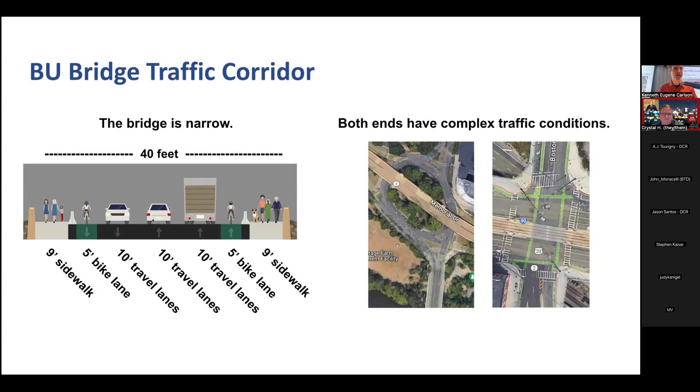A lot of moving parts: pedestrians, cyclists, cars, and turning cars. Peter will go into detail on that. And then the corridor itself - the corridor is not just the bridge, it's the rotary, it's the Comm Ave intersection.

On the bridge itself, 40,000 cars a day, 2,000 bikes a day, and thousands of pedestrians. Two MBTA bus routes crawl through the corridor, plus several shuttle bus routes. Many more people traverse the travel corridors parallel to the bridge, including the Paul Dudley White bike-ped path. Many people cut across that mouth of the bridge, and it's very dicey for anybody walking or running, with all the cars on Comm Ave.

The root of the difficulty of this bridge and corridor is that it's multi-jurisdictional, as Senator Brownsberger was saying. DCR owns Memorial Drive, the river paths, and the rotary. MassDOT owns the bridge and Comm Ave intersection. The City of Boston operates the traffic signals right here. The MBTA operates the bus service over the bridge.

We have Becca Wolfson here from the MBTA. City of Cambridge owns the streets approaching the bridge - are the people from Transportation Cambridge here? Yep, there we go, hello guys, good to see you. And the Town of Brookline owns the street to the south - anybody from Brookline? Oh hey Amy, how you doing, good to see you.

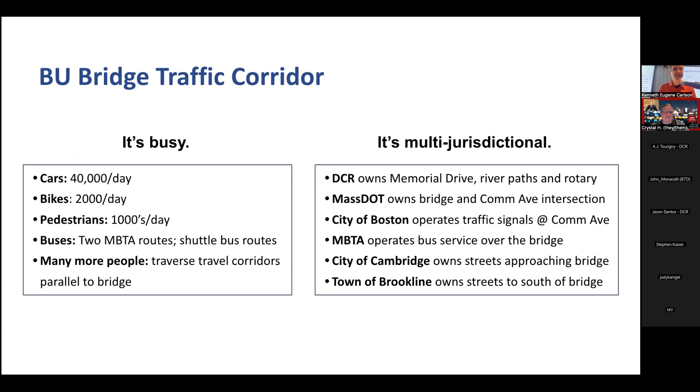So obviously it's multi-jurisdictional, which makes getting things done on such a corridor difficult. So what we did was bring together this alliance - we pulled together this impressive group of advocates who were undaunted by the multi-jurisdictionality of the corridor. The goal was to identify traffic safety improvements with a primary focus on vulnerable road users.

But we gave ourselves these constraints: the bridge is not going to get any bigger, so we proposed no change to the number of travel lanes. We didn't want to make traffic worse for local residents in Cambridgeport, but we wanted to maintain, if not improve, vehicle throughput. People in Cambridgeport are already suffering enough, so we focused on quick-build, low-cost improvements to improve safety.

We spent our first year working with these constraints, developing and honing recommendations, which Peter will walk us through. Then we spent this past year socializing these improvements, gaining feedback, and pushing for implementation. We shared these recommendations with DCR, MassDOT, BTD, MBTA, Cambridge, Brookline, BU, and a host of other advocacy organizations and neighborhood associations. We circulated a petition last year and got 850 signatures to date.

We haven't done anything further with that petition - I'm sure we'd have thousands more if we kept pushing it. We held our first public meeting on the BU campus last year, and now we're meeting with you all this evening. I want to point out that we've worked very closely with DCR, who have been really amazing in terms of their receptivity to what we've been proposing. We've had a number of meetings with them - in fact, Peter and I were just meeting with DCR last Tuesday.

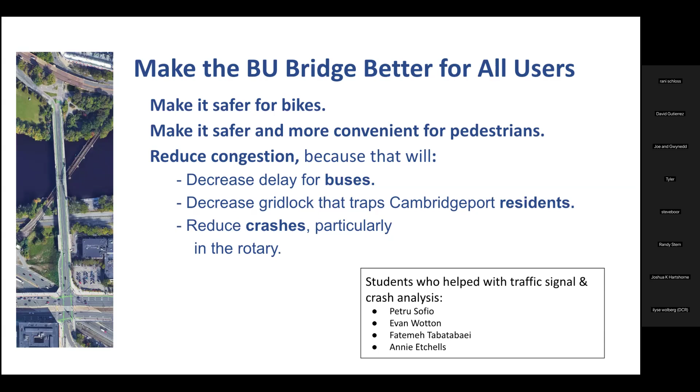And we want to also reduce crashes. For bike safety, as I've said, there isn't a protected bike lane, but it's easy to focus on what's on the bridge. When you get off the bridge, we have these conflicts with right-turning cars.

You can see over here when pedestrians are crossing Comm Ave, at the same time cars from Comm Ave are turning right. Sometimes 300 an hour are turning right, trying to get through.

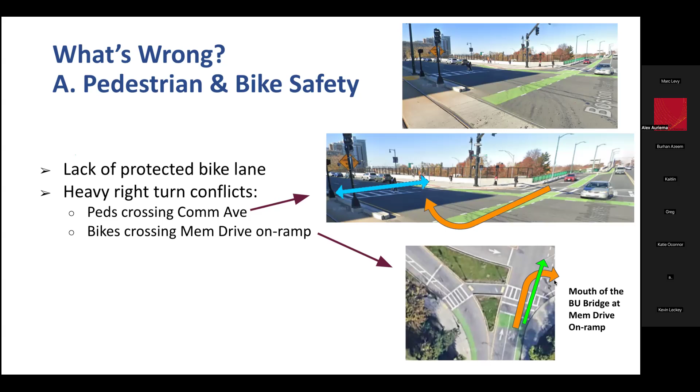And then on the other side of the bridge, when bikes are trying to get through, leaving the bridge going into Cambridge, cars are turning right at the same time, 496 an hour. It's amazing.

And then the massive congestion makes things slow, as I've mentioned, and there are a lot of crashes and injuries. The last time we studied this, we looked at this 5-year period, and there were 87 crashes, including 15 bike and 2 pedestrian crashes. The largest number were in the rotary, 55 in the rotary.

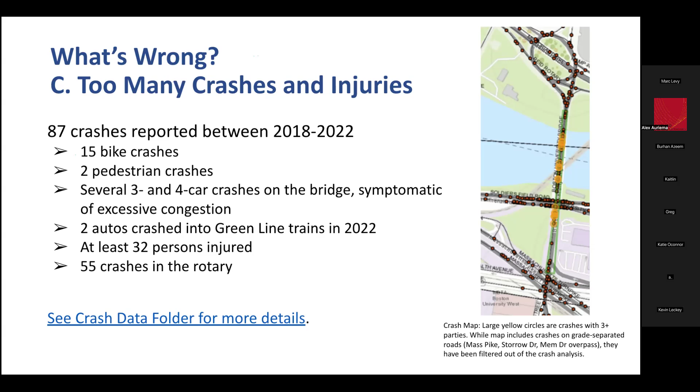So our proposal is kind of comprehensive. We want to fix things everywhere for everybody. For bike safety, it includes protected bike lanes, signal separation, a wider path along Mem Drive, and safety improvements to the rotary. For pedestrian safety and service, the signal separation I've talked about, some crossings across Comm Ave, and synchronized ped crossings at Mem Drive.

If you see those red asterisks there, we've gone through a few iterations. Our first iteration, we wanted to make things better for pedestrians by making things a little bit better. We had a plan to make things a little bit better. Then Boston looked at our ideas and said, well, we have an idea, we can make things a lot better. And when we saw that, we said, totally, yes, you got a great idea. So our concept has changed to go along with that, and relieving congestion.

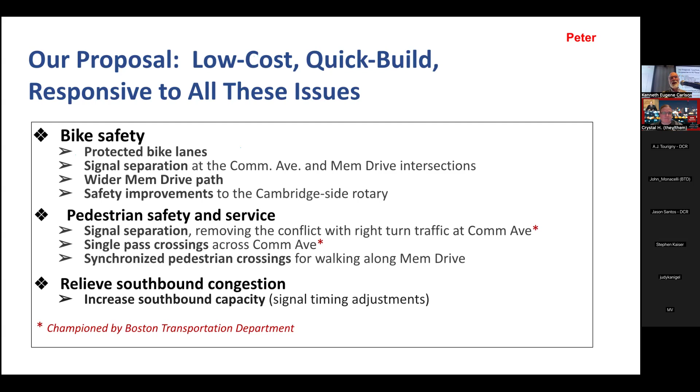So to make it safer for bikes, everybody knows the current situation: there are no protected bike lanes. What we've learned is you can turn a bike lane, if it's not next to a parking lane, you can just put a little barrier there. Even flex posts work because they make bicyclists really feel this is a place cars stay out of. We already have it on the Museum of Science Bridge, which MassDOT owns.

People say, oh, the bike lanes on the BU Bridge are so narrow, it wouldn't fit there. Well, thank you to our friends in Brookline. They did an experiment, they put flex posts like this on Harvard Street in Coolidge Corner, which is even narrower than the BU Bridge bike lane. When you ride your bike through there, yeah, you get the feeling this is kind of narrow, but you just ride through and you don't have cars double parked there. You really are separate from cars.

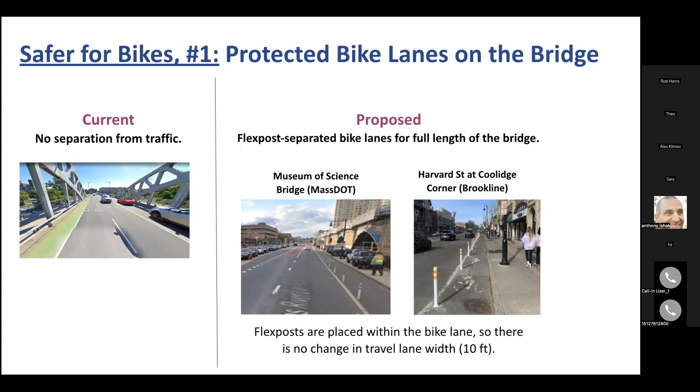So when we asked our friends at MassDOT, is this something you would consider doing? You've done it on one bridge, is this something you'd consider doing on the BU Bridge? They said, yeah, sure. Oh, okay. All right, number 2.

Now, a little more thorny is getting that signal separation when you're leaving the bridge. I described to you the situation on the Cambridge side where the problem is that cars have 2 lanes, and from the rightmost car lane, some cars are going through, but some are going right. So what we propose is to change it so that only 1 lane is for through-going cars and 1 lane is for right-turning cars.

That way, the right-turning cars get their time in the cycle with a green right arrow, while bikes and pedestrians have a stop signal. Then the right turns' phase is over, and pedestrians and bikes get their turn, free from traffic. You might think there won't be enough capacity for cars because of the right turns, but remember, when you're turning right, you really can't go through pedestrians and bicyclists anyway. It turns out there's plenty of capacity, since more cars go straight through than turn right, and the light will just be green longer for through traffic than for right turns.

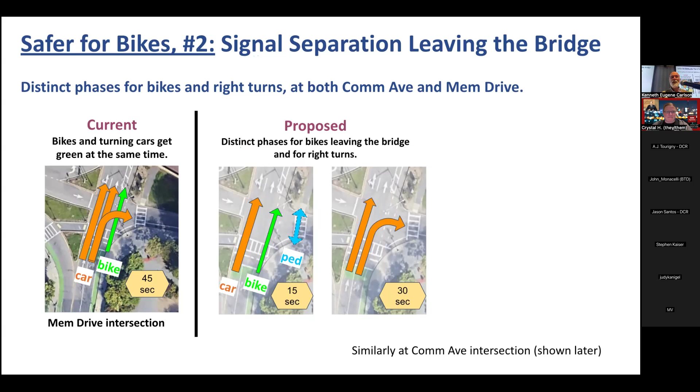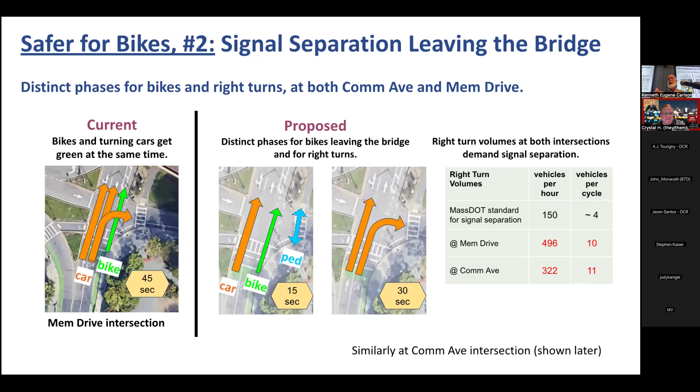The last time the BU Bridge got major improvements, around 2012, some of you were involved. They made huge improvements for pedestrians walking along Comm Ave, and really nice improvements for bike lanes along Comm Ave, protecting bikes from right turns. But it was too big a problem to deal with the other direction at that time. Now we're getting to the other direction, and it's way beyond standards, so we're going to deal with it.

A third way to make it safer for bikes: when you cross the BU Bridge and head up the ramp toward the BU Boathouse, MIT, and Kendall Square, there's a narrow sidewalk. Bicyclists often have to go in the street because there's no room on the sidewalk. It's a question of giving cars the space they need and nothing more — cars need space for one lane, they don't need anything more. So this whole area that cars don't need should just be turned into sidewalk.

I'm happy to say that right now, our friends at DCR have their shovels in the ground — they started that a couple weeks ago. And likewise, on the Memorial Drive path, the Paul Dudley White path upriver from the bridge, that's going to be made really nice and wide.

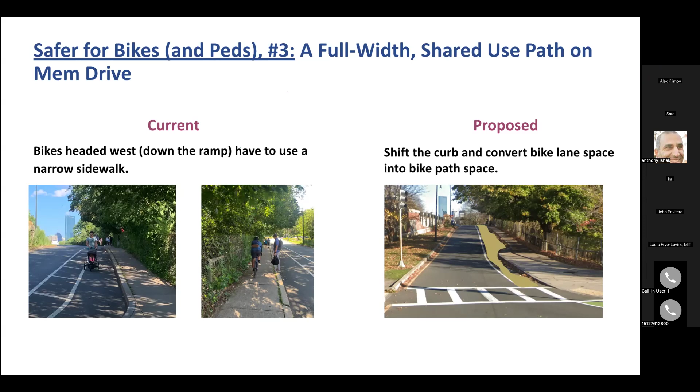The last thing for safer bikes: we need some more fixes in the rotary. When you come down the ramp from Memorial Drive, there had been a yield sign. Yield signs are for freeways — you're coming down to a city street, and at city streets what do you have? Stop signs. On top of that, there's this big bridge pier — you can see the big brick pier — so car drivers can't see who's coming. You don't want to combine that with a yield sign; you need to stop so you can look and see.

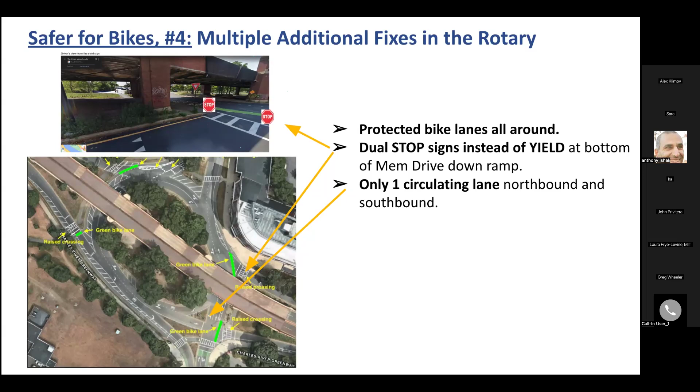Our friends at the DCR said, yeah, no problem, you're right — stop signs, bingo. Here we go, and several other changes. We'll be hearing from DCR later. Some things they're able to do now; the rest we're working with them toward implementing next year.

Then when we get to the Comm Ave intersection, we're going to have signal separation. The way it is right now, if you're walking across this crosswalk, there are hundreds of cars an hour turning at the same time, and you're competing with them. So how are we going to change it? We'll have a short phase just for right turns.

Right now there's one through lane and the next lane is also for through traffic. That's going to change — there will be two lanes turning right. First we have a short turn phase to clear out whatever cars are there. Then we have a nice long phase where through cars, bikes, and pedestrians can go, but right turns are stopped. When pedestrians have cleared, anybody turning right just moves over and stacks up in these lanes. We've got room to store them, and then out they go — we get good capacity.

So here's the best way to get to it. Okay, here it is. Okay, so watch this.

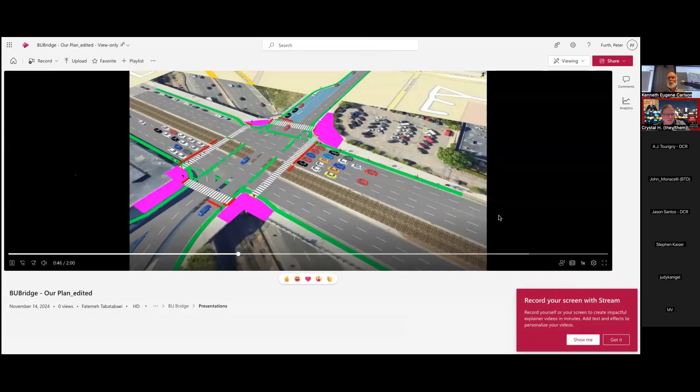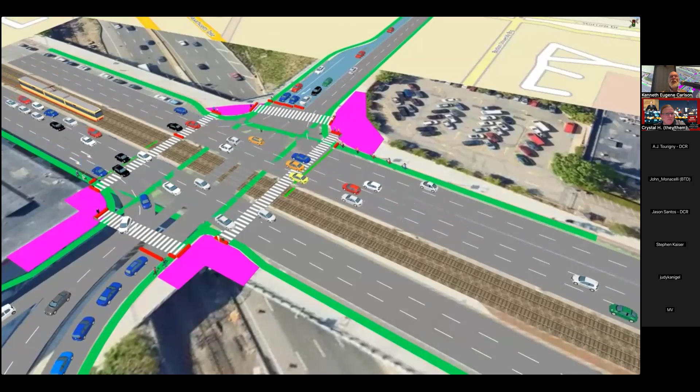All right, the road with the blue surface, that's the BU Bridge. Now watch the traffic on the BU Bridge. As the light is red, cars stack up. On the side, you'll see some pedestrians coming over and waiting in these places, and you'll see how they get through with a single pass.

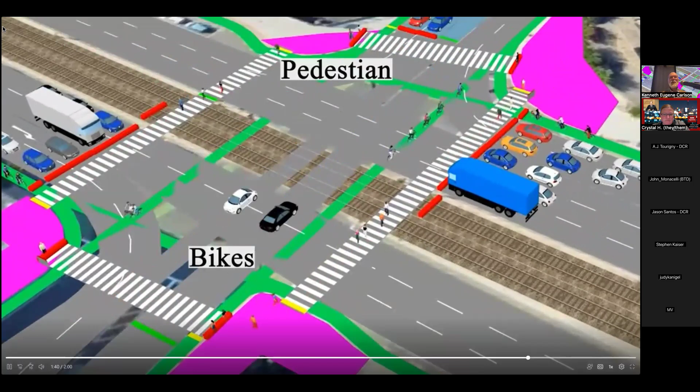Now the light is green. These pedestrians start walking, and at the same time we're clearing out the right turn here, but that ends quickly. The pedestrians who are walking pause for a second or two, then finish their walk. Then pedestrians go in the other direction. The bikes are going, and all this time the right turns are being held. Once the pedestrian phase is over, the second right turn phase goes, and with that combined operation we get about 20% more cars through than are getting through now. So we get better pedestrian safety, bike safety, and some congestion relief at the same time. It's a great win-win.

How do I get back to the— here we are, okay, all right. I get nervous about the power on the computer, because when that goes we are in trouble. I don't know if we're going to reach. Yeah, it's a tripping hazard now, sir. Let's just make sure we actually have some power coming through. We do. Wonderful. So be careful, you've got your border right here, buddy.

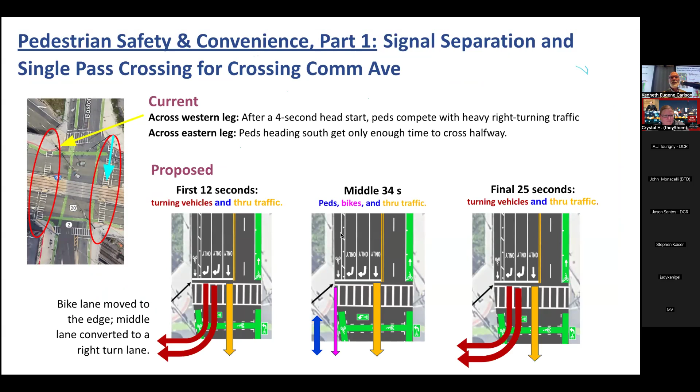I don't know if you mentioned the pocket bike lane being out. Yeah, you're right, I didn't mention that. So here at the BU Bridge, instead of a pocket bike lane, which is what we have now, where you're riding a bike between two lanes of traffic, the bike lane will be all the way on the side, on the edge, with the flex post separating you all the way to the intersection.

On the Cambridge side of the bridge, one issue is that there are two pedestrian crossings, but they're not coordinated. So you cross, get to the middle, and have to wait there until your walk signal comes up for the other half. What we're proposing is to coordinate them both, put them on the same cycle, so pedestrians walking in this direction start walking, and when they get to the second crossing it's still on that flashing don't walk, so they can finish their walk. Pedestrians in the other direction likewise start here and finish there.

I call this the trapezoid method of coordination, because you see the pedestrian phase on one side is not the same length as the other. That's because cars need more time over here, and they need less time over here. So you just shift the green time from one side to the other and get more efficient as well.

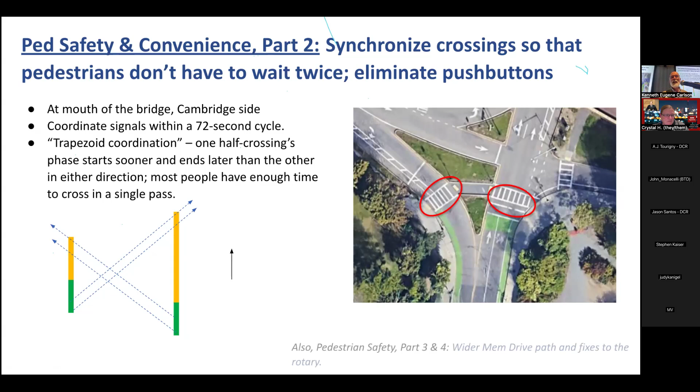Here's a video of how traffic—it'll start with how traffic is now.

All right, here's how it can be and will be.

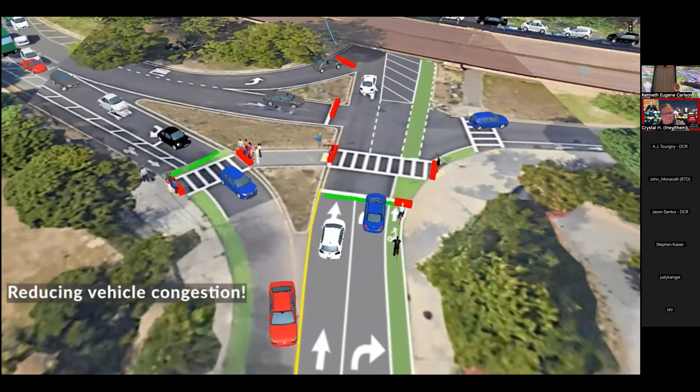And we've asked the DCR to mount speakers and play this music. Yeah.

Well, you know, what you put in the simulation is what you get out.

The creator of this is here, so I want to honor him by letting it play to the end.

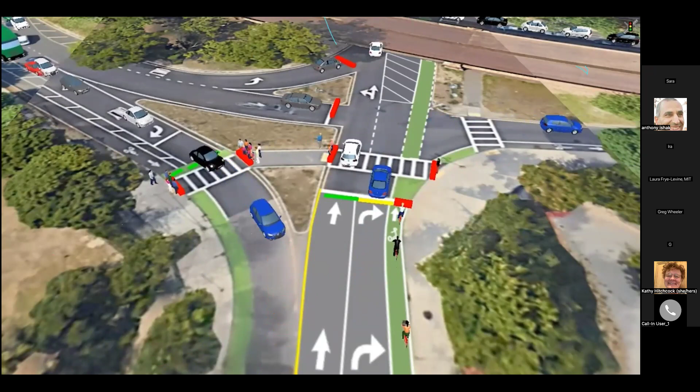All right, you want to give Evan a hand—the first one was by an investment banker. And the first video was made by a student who's here, Fatemeh, so thank her. Okay, wait, here we go, okay.

As far as reducing congestion, one big puzzle, if you're a traffic engineering person like me who loves puzzles, is what is the real bottleneck on the BU Bridge? Is it the intersection on the Boston side here, not releasing enough people, like the green isn't long enough? Or is it that crosswalk on the Cambridge side that stops traffic so nobody can get onto the bridge? It turns out they are both bottlenecks.

So to reduce the congestion, we're working on both. On the Comm Ave side, I've shown you how with two right turn lanes and a smarter way of operating the signal, we can get a 20% increase in capacity. On the Cambridge side, by coordinating the signals, the cycle will be longer. A lot of times you'd say, oh, but that's not good for pedestrians, a longer cycle—yeah, but it's a longer coordinated cycle. So you have to wait a little longer for the first crossing, but you won't have to wait at all for the second crossing.

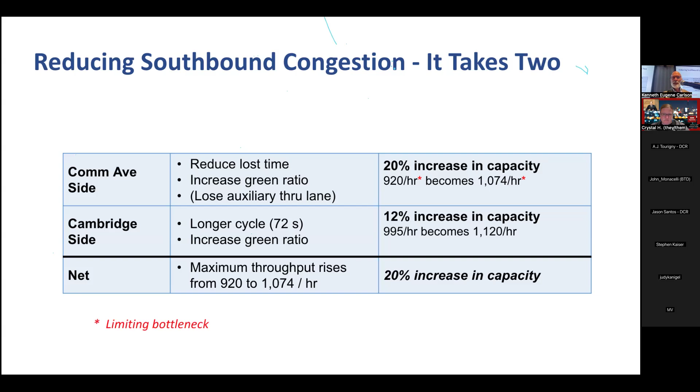Then I'll give you an overall picture of the timeline for the improvement.

First is widening the Charles River paths at the Rotary, and the DCR owns that, and they are doing that right now. The next, when you get up going around to get to the boathouse where John Corkin was killed, there we saw there's a vulnerability that cars coming over the overpass have to turn, and if they're not paying attention, they're just going to mount right up on the sidewalk.

So we've talked about adding a crash barrier there, and that still has to be permitted, but we hope that'll happen soon. Then the next set, they're colored together because they have to be done at the same time, doing the other fixes in the Rotary.

And the other changes of the Cambridge side intersection, including putting up some new signal equipment, a mast arm—that's a mast with an arm, traffic engineering word, and then the lights hang down from it. So that's going to take some time, but hopefully that will be done next year.

And then the new changes in signals, that could only be done at the same time that you change the striping to say one lane for through traffic, one lane for right turning traffic, and working with MassDOT to make that happen. Then here on the Boston side, we need to have the lights retimed, a few new signals put up, some new bike signals.

And that has to be done simultaneously with restriping.

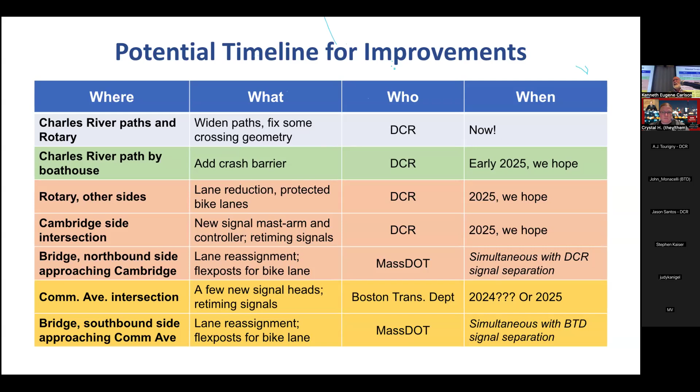That change and the Commonwealth Ave signal changes could happen this fall if they can get to it before it gets too cold. Once it's too cold, you can't lay down striping, and then we have to wait till spring. So it's just a very optimistic timeline ahead of us. So, hoorah.

Only Peter Furth can make civil engineering fun.

Okay, so now we're going to hear some stakeholder perspectives before we get to our colleagues from DCR and BTD.

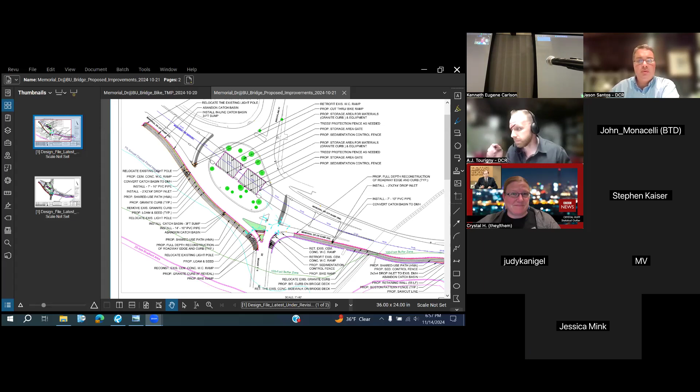Bear with me, here we go. So this is the construction plan for the short-term improvements on the BU Rotary side of the BU Bridge.

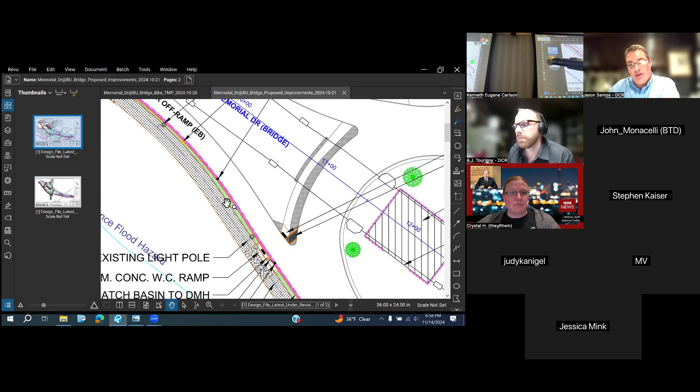The improvements started at the Magazine Beach entrance, here's the outdoor gym area to Magazine Beach. If you look closely, the gray line represents the old curb line, the purple is the new. We essentially took the sidewalk from a 5 to 6 foot wide sidewalk and made it a 14-foot wide shared use path.

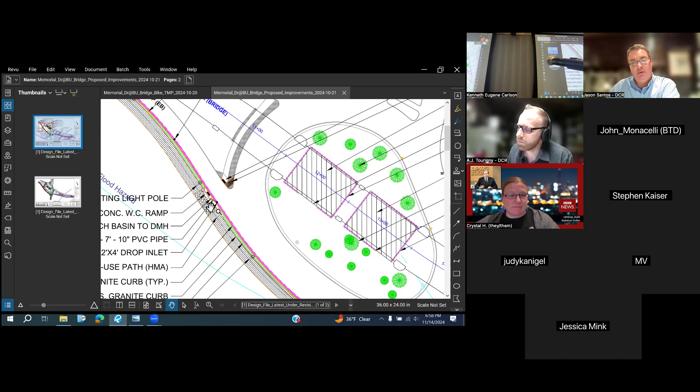We widened the wheelchair ramp connecting to the Rotary, added bike ramps, and widened the sidewalk under the Reid overpass, making that a shared use path as well. We had to do some catch basin relocations to push that curb line out. The widening continues up towards the BU Bridge, with another catch basin relocation and a light pole relocation.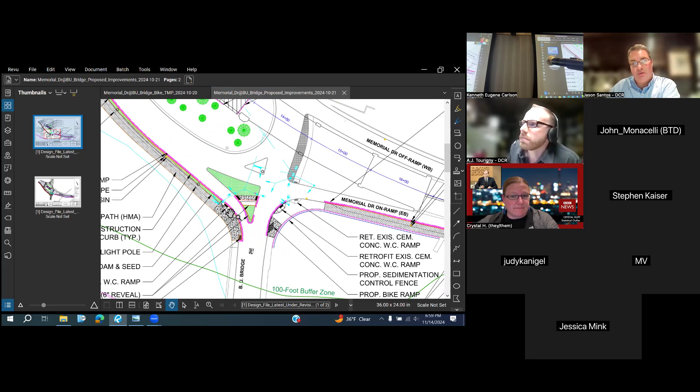So again, 14 feet continues all the way up to the BU Bridge. We widened the wheelchair ramp near the intersection that Peter was showing you earlier, and we added a ramp for bikes only, so as you're coming up around you have the ability to drop down onto the BU Bridge surface and continue up and over the bridge.

I'm going to jump over to a couple of progress photos. This was about a little over a week ago, in that area widening the sidewalk. We're paving the entire 14-foot wide width. This is the opposite view, turning 90 degrees towards the Reed overpass.

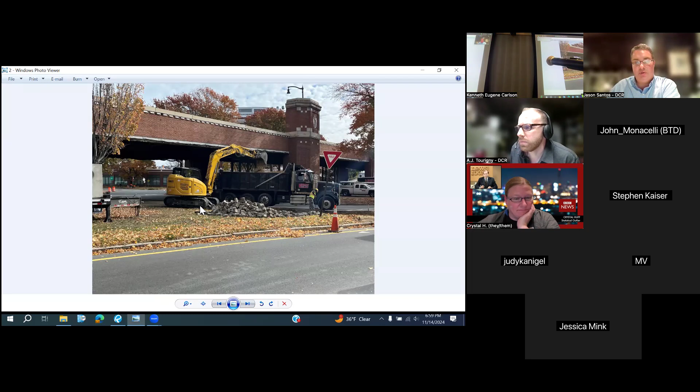We are demoing the sidewalk under the Reed overpass and repaving that entire area. And this is up near where I was just showing you, near the intersection of the BU Bridge, paving all of these new wheelchair ramps much wider and in concrete.

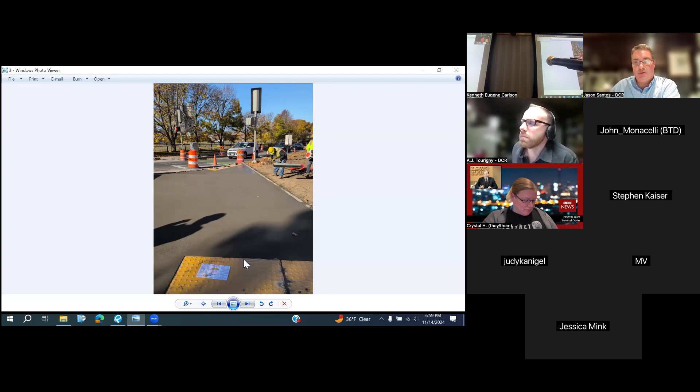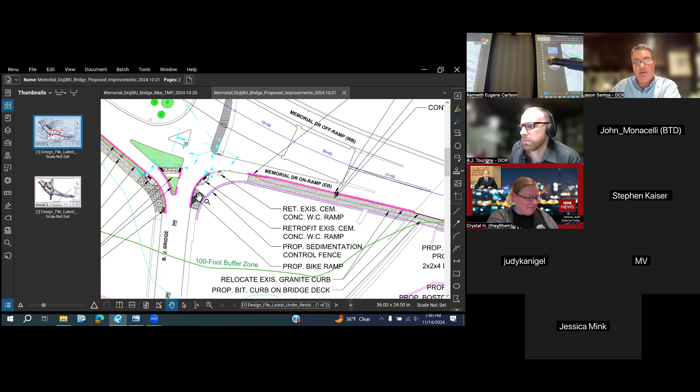Jumping back over to the rendering, we widened this crossing through the island to accommodate both peds and bikes. We widened the wheelchair ramp. On the east side, we created a bike-only off-ramp so that anybody coming up over the BU Bridge has a way on their bike to exit and get up onto the newly formed shared use path.

Similar to this side, we had to move a couple of catch basins out. This side is about 13 feet wide. We had some constraints with MBTA buses making that turn, so we maxed that out at 13 feet.

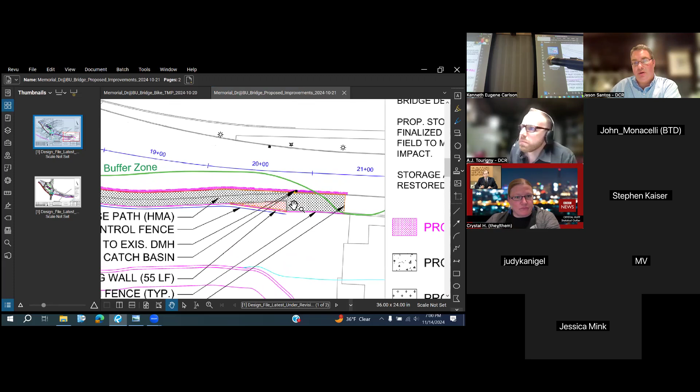That widening continues all the way up to the BU boathouse. This red triangle here used to be a jog in the sidewalk, created by a retaining wall. We've removed that retaining wall and created a nice taper going from 13 feet to approximately 15 feet in front of the BU boathouse. Again, another catch basin removal.

And I'm going to show you just a few photos of that side. Just bear with me.

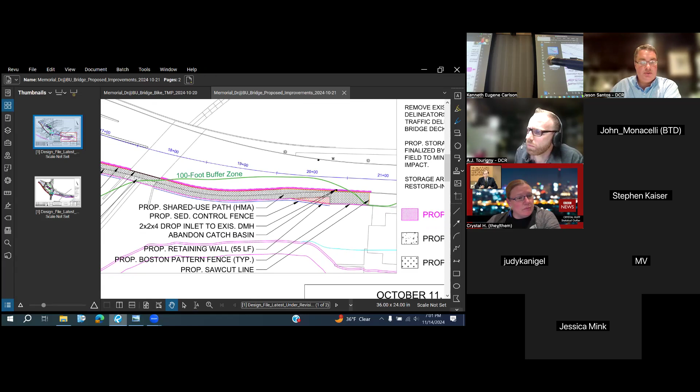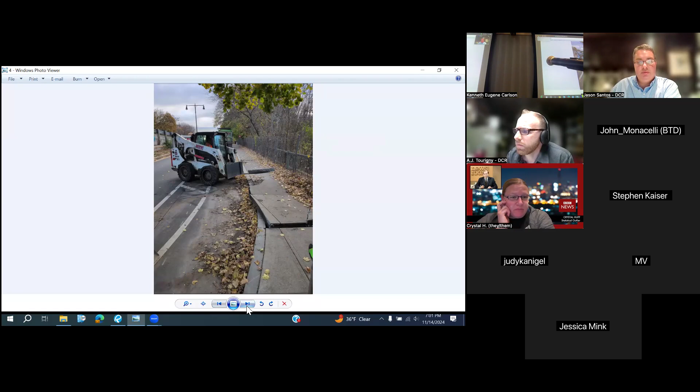This was just this week and last week - we were demolishing the sidewalk going up the eastbound on-ramp, heading up to the BU boathouse. This is a view from up near the BU boathouse looking down. The detour is in place and that piece of equipment is working its way up.

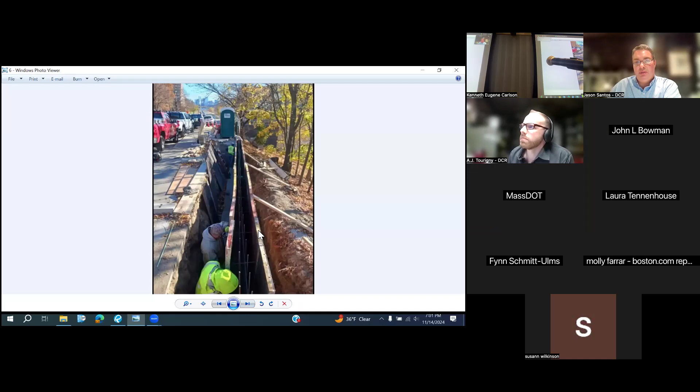And this is rebuilding that retaining wall and creating that triangle shape. This will eventually be filled in all with sidewalk to make a nice wide taper. And that's about it.

Jason, there's a room full of smiling people who appreciate all those things that you're doing.

Oh, can we hold the questions till the end, and we'll come back. But anything else, Jason and AJ, from your side? I think that covers it, Ken. I appreciate it. Yeah, that covers it, Ken. Thank you very much, and thanks to you and Peter for all your help. Thank you. Okay, great. Well, I think we're going to go then to John Monacelli. After John, then we'll get to hopefully a robust Q&A period. So, John?

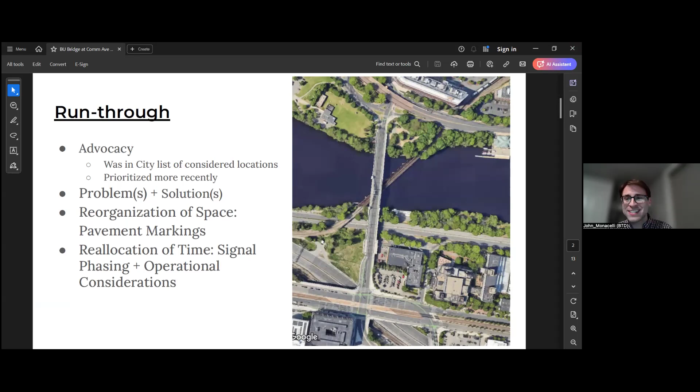So focusing on this southbound approach on the bridge, technically, as the professor said, this is on terra firma. So essentially the top of that photo until where you see the bridge joint rejoin to the intersection, that is technically DCR land. So Jason's been very kind to allow us to present a variety of things over to him and his agency for consideration. And again, all of you folks have been working on your side to convince him and others that we can do this.

So right now, the biggest problem listed is the southbound right turns. So folks coming down the bridge, going from that one lane, kind of on a downhill slightly, crossing over the bike lane, and then going into that rightmost turn lane. And then while that's active, making that turn over those pedestrians who are in the crosswalk.

Right now, as folks have said, these are the volumes roughly for the peaks that we use in the models. As you can see, they're well in excess of our guidelines currently for permissive vehicle-to-pedestrian conflicts.

So that's one piece. And then, as I mentioned, this crossover point on the bridge, and then an overwhelming concern or kind of like a need to look at how long cyclists are allowed or provided time to get fully through the intersection, right? We know that there's a range of speed cyclists can take, but most of them are lower than the 32-mile-an-hour average of the driver. So really taking a quick look at those to see how we can lift those clearances for all-red times or different intervals to keep people safer before cars start moving in the opposite direction.

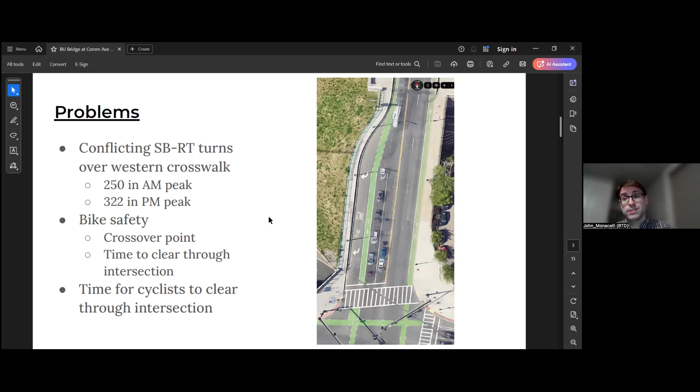Quick, so those same problems on the left, no photo, sorry about the text. But these are our kind of considerations quickly for what we're doing.

That conflict with the right turns, we're going to take the bike lane and shift it over, or we're asking DCR very nicely to take the bike lane and shift it over to the curb. And then we're going to kind of reorient how many lanes we have, and we're going to phase separate, is the technical term. So we'll just be running folks who are making the right turn, and everyone who's kind of going up and down north-south will have, they'll all get their separate turns. We won't have them interact at the same time. So that solves that problem.

As I mentioned, bike safety and that crossover point, moving it against the curb removes that interaction coming off of the bridge. Again, when folks are kind of coming down the crest, not a great time to be maneuvering downhill with the interaction. And then that last part, super easy.

We're just going to recalculate those equations for the red times to make sure that someone going 12 or even 10 miles an hour, perhaps, can make it all the way through that intersection before something else starts to move and to stress out that user.

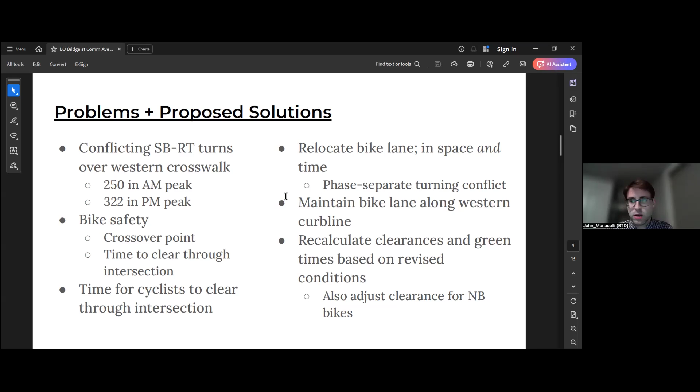So just a couple quality things to add here on top of the safety pieces. It's a reorganization of space, as Ken and some others have stated and reiterated. We don't have any more space coming in the short term, so we have to use the 62 or so feet that we're given.

This is not a reallocation of the space, unfortunately. Right now, what we're just trying to put down is the structure of reorganizing. So this is no secret now, the big reveal has been spoiled. This is the comparative current on the left and the proposed, straight from the plans, clipped so savagely.

Sorry about that. As you see, keeping cyclists in mind, we're going to make a nice thicker line along the bike lane. Typically we use a thicker line like that on bus lanes or highway elements to really focus attention, but I wanted this thicker line here so that it lasts longer. It's just a feature of being on the road, the thermoplastic wears away, so the bigger the line is, the longer it'll last.

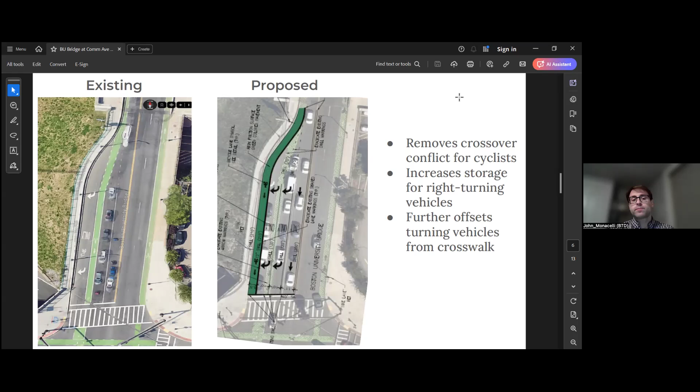And then go to this guy here, reallocation of time. As I said, we're aiming for the phase separation. We did consider a couple different alternatives just to try to see, to kick the tires and see if there was anything holistically that we needed to change at the intersection, or that we were able to change.

So we tried some things. We tried a single right turn lane and tried to see how we can make that work. But as others and the professor have laid out, there's a real concern for exceeding that storage. That new pocket is only so long, it's not granted to us the entire span of the bridge.

But ultimately, what we ended up landing on was a tenuous balance for the time being to do two right turn lanes and then a single through lane.

And again, that was run through a little bit earlier, but I just wanted to emphasize, when we ran through the traffic model, which is definitely not as cool as the one the professor had with his grad students, but when we ran the one that's inherent to the traffic-aware software there, SimTraffic, it does allow us to see some variability in the platooning of people coming over the bridge in kind of spurts and fits.

And what we're able to see is that for the most part, unless there is that Red Sox game, we're really only predicting that people are going to be stored on that bridge. Long-winded way of saying, we are not expecting that queue to go all the way back to the rotary right now. So as we continue moving forward, we're going to keep moving time around at the intersection to keep that as minimal as possible. But right now, we're not even predicting some really bad situations, so we're really optimistic about this.

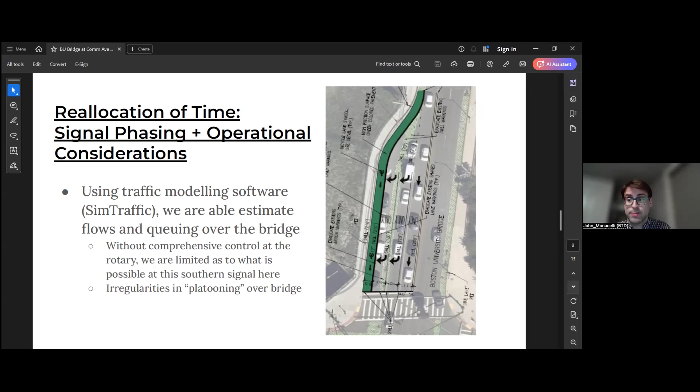Because when people can predict what's going to happen - more on grid streets to think about - but when people can predict what's going to happen, their aggression or their anxiety goes down enormously. So we're going to try and produce some of that predictability.

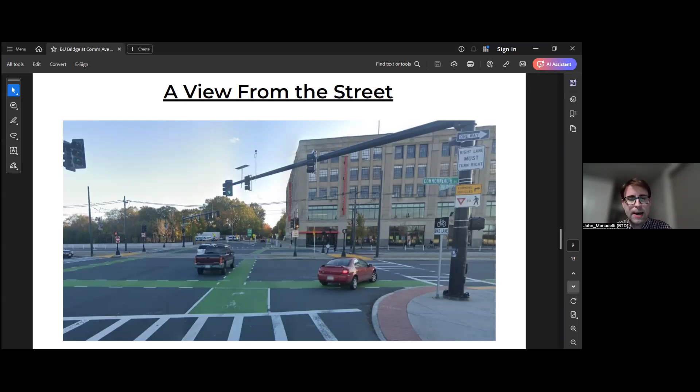We'll be swapping out some of those. We'll be giving cyclists some new indications to better clarify, to show them very clearly, now is the time not to be going, please. Now is the time for those right turners to be turning across, and vice versa for those drivers.

And again, we'll be watching this on several of the cameras that we have. If we're able to implement this fall or this winter, we'll be taking a look, keeping an eye on it. If there's any tweaks or any type of adjustments that we need to make, we'll be doing so.

Again, implementation - we've been sharing things back and forth with DCR. As the City of Boston, we're going to be doing the changes to the infrastructure on the signals, the wiring, the timing, and the controller updates. DCR would oversee the work directly on their right of way on the bridge landing for the minor resurfacing and pavement marking restoration.

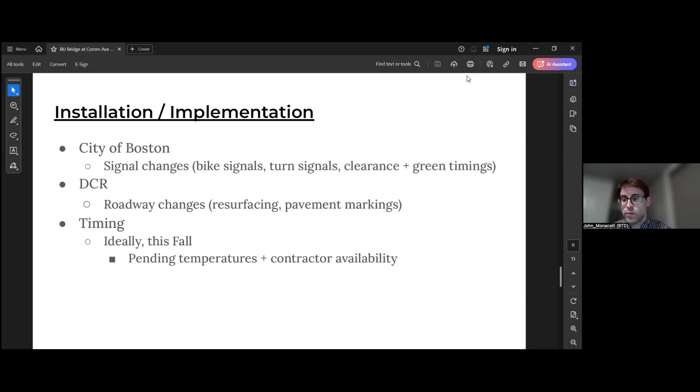Ideally this fall. So we're just kind of having everything packaged up and sitting waiting so that we can be ready to move when possible.

I mentioned post-implementation again. If we are able to install this winter, we will be keeping an eye on everything. I believe we also have a camera on the Cambridge, the Mem Drive side, so we can pull those both up, keep them side by side on a separate screen, and keep an eye on those in our traffic management center. It also allows us to do a bit of an adjustment period to see what is really sticking and what is actually impactful to the benefit of our plan.

Otherwise, in the spring we can continue talking over the winter about any additional adjustments or other changes to phasing and things like that. So this is not done, but we do want to get something on the ground as soon as possible.

And I know that we said questions later, but everyone needs a happy dog with a tie. So thank you guys so much.

Okay, so we are going to hear briefly from our colleagues at MassDOT, and then we'll open up to Q&A.

We've got Steve Miller pining very nicely about the fact, John, that you are willing to make changes continuously after implementation of what you guys will be doing. So I will turn it over to our friendly colleagues from MassDOT.

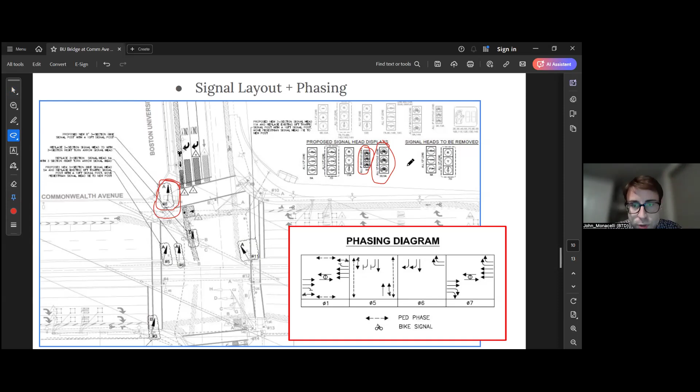Okay, so whether or not you can see my cursor, but this guy here - we see it, yep, there we go - that will be the smaller one here. It's just what fits, what wires in. So you'll be able to see that light as you come down the bike lane, down the bridge. And then these other two will be a lot bigger. They'll be the standard size of traffic signals for cars, but they'll have the lenses for the bike symbols. So those will be on 5A, that'll be down here on the transit way. And then with 3B, where are we?

Oh, I believe that's the one for eastbound, or westbound cyclists, sorry. So it'll be these two on the right-hand side. We will continue to see where we can move things around. Moving signals on top of mast arms is really difficult because of moment analysis. We have to be careful where we put certain things, and there are guidelines for the number of indications required per movement of vehicles, so we have to work backwards on that, unfortunately. But we're going to keep looking to see if there's better placements for those bike signals.

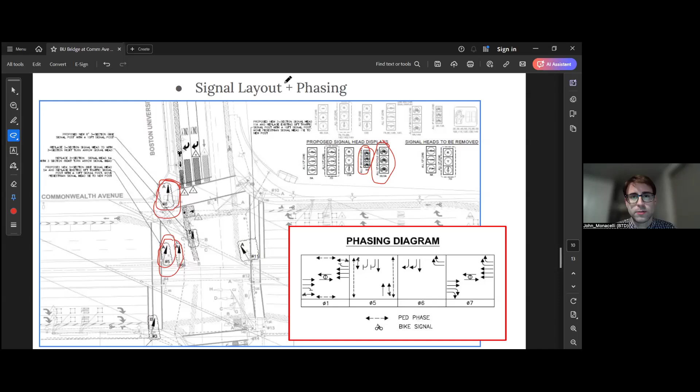We have an online question from Alex Orima: I appreciate the addition of flex posts, but they are ineffective in protecting peds and bikes from cars. The ones installed at the bridge by MassDOT four years ago have long since been demolished and not replaced. Can we do what the rest of the world does and use concrete bollards or armadillos like those placed on Mount Auburn Street? I guess that would be directed to MassDOT.

We're a little more constrained than the cities and towns are by federal highway approval—I'm not sure the details because I'm not a traffic engineer, but I believe it's MASH compliance. So we do have a pilot project in planning to test some out and see if we can get them across the hurdle we need to use them more broadly. There's a wide array of bike lane barriers used in other jurisdictions.

And would that maybe help quell some of the concerns for flex posts on such a narrow five-foot bike lane? Would that help get you guys there? You don't know—okay, defer to the engineers.

Okay, so now a question from this side of the room. Could we move towards some intelligent lights, traffic lights that assess and look at the demand in different directions and change the timings dynamically based on the situations instead of fixed timings?